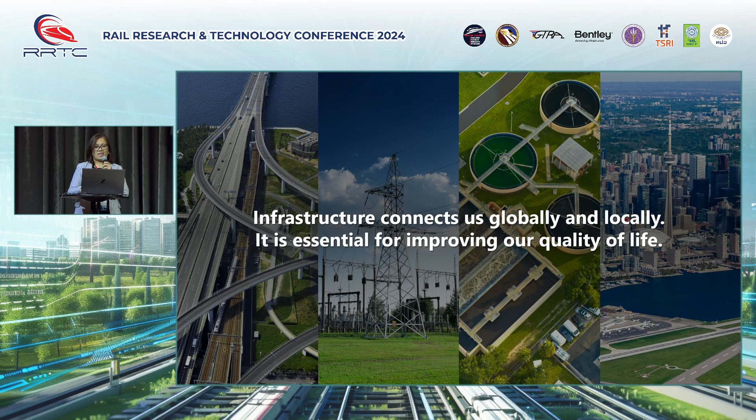And the technology has evolved so much. For the past 40 years since Bentley was founded, our founders, the Bentley brothers, have seen how technology has evolved over the years. From where we save our data, maybe from disk drives, desktop PCs to servers, to mobile devices, and now through different cloud platforms like OneDrive, Google Drive, and the likes. In line with this, we have seen continuous possibilities on different types of project deliverables, from 2D, 3D, 4D, and it keeps on changing.

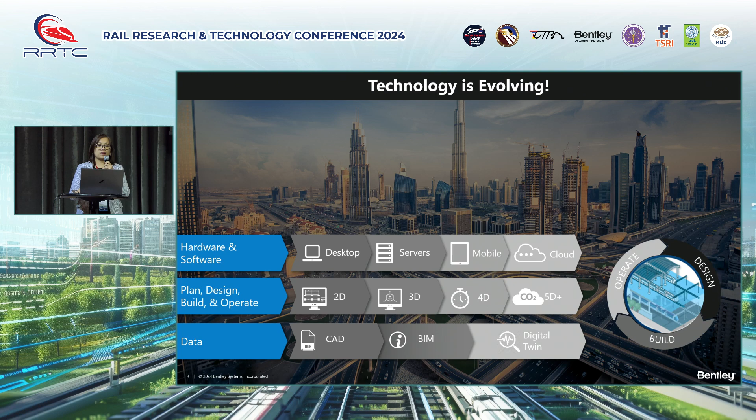As for the industry practices, we have evolved from CAD, BIM, and now the buzzword is digital twin.

Now, despite these advancements in digitalization of the transportation sector, the sad reality is that most of us are still trapped in the traditional way of doing project delivery.

Traditional project delivery relies on point solutions. When we say point solutions, there is this concept of handovers, wherein the handover from design into construction, then from construction into operations and maintenance.

And most often, these handovers are from different organizations. So one organization could be the one performing design, then they would hand it over to a construction firm, and then once the asset is created or augmented, it would be handed over to operations and maintenance.

But this handover, or those handovers, are quite fragmented, and those point-to-point connections lead to loss of information, and the value of the data has become useless.

For example, during the design process, many designers are not looking at the entire problem. Maybe they would only be concerned with their own project deliverable, and they are not looking into using different types of data to help them collaborate with other disciplines. They're not looking at the bigger picture.

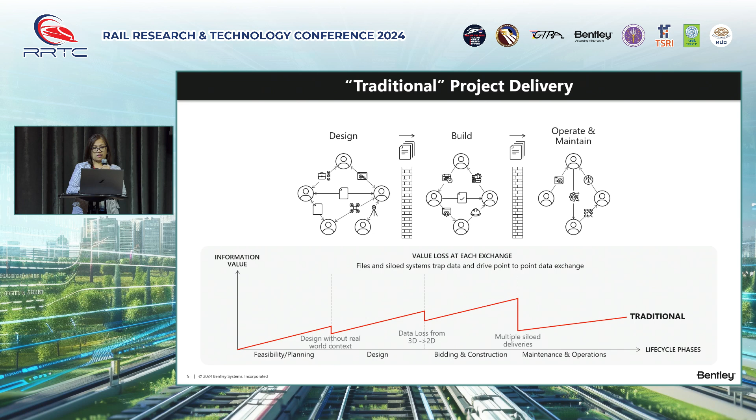Now, ideally, we would want to have a data-centric type of project delivery. Using data better is the key to addressing the changing environment that we are in. This graph here illustrates the value of information comparing a traditional handover with a data-centric and collaborative approach.

With Bentley, we are reimagining how we are leveraging data centricity to enable collaboration and ultimately connect people and data along the entire project lifecycle, from planning, design, build, and operate.

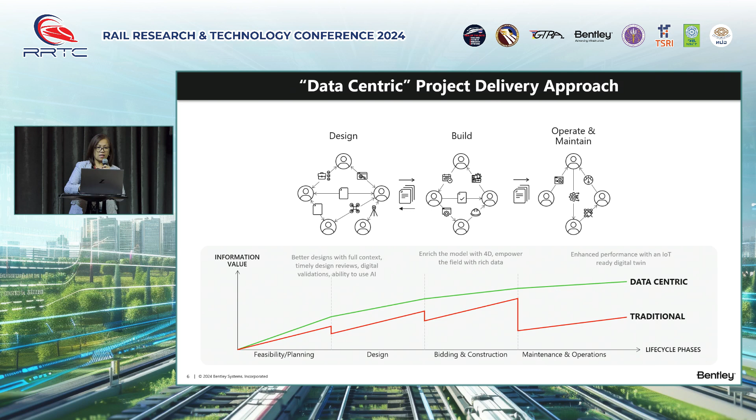Now, here's a sample, although I'm not too sure if it's clearly visible on the screen. Here is an example of a proof of concept of a railway project shown in an internet browser.

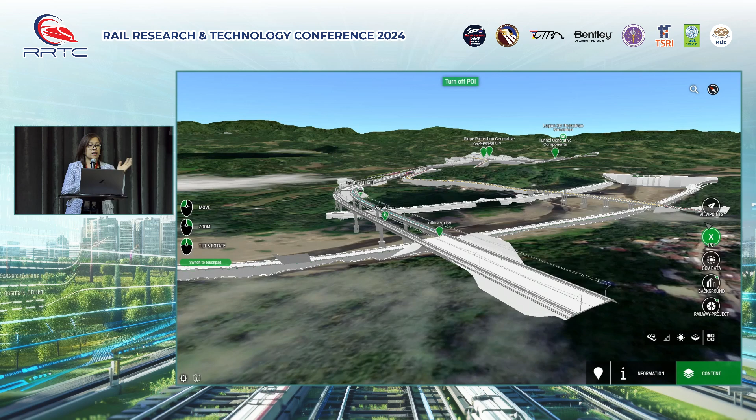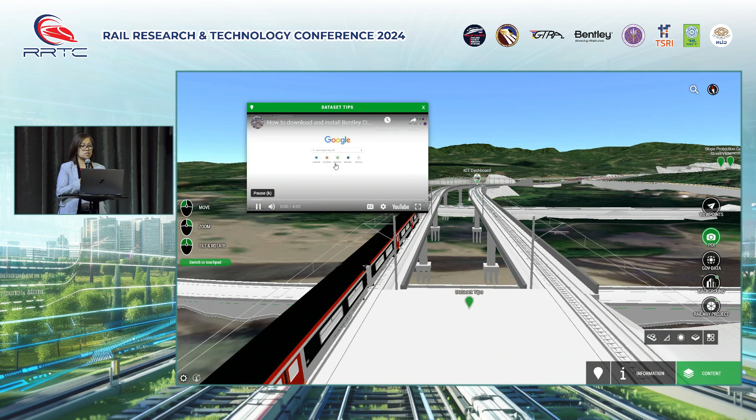These are federated models from different project teams. At the very start, the project is geo-coordinated to make sure that all submissions are using the same coordinate system, and the railway corridor was actually designed using an open solution or application of Bentley.

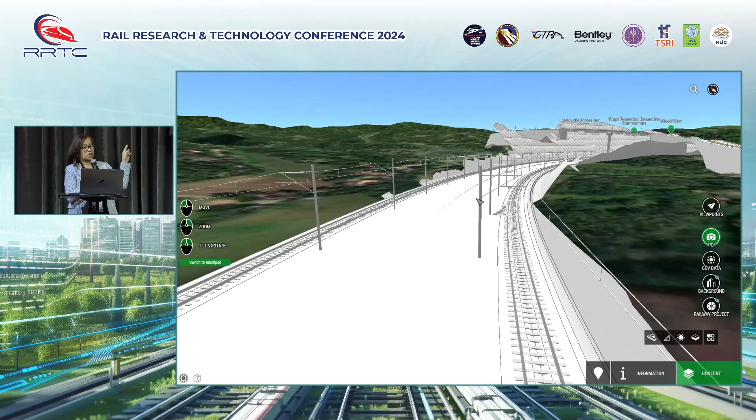Some parts, like the stations, were modeled using third-party software. And this graphical user interface is also able to link to IoT sensors to give information as to how the asset is performing as designed after construction.

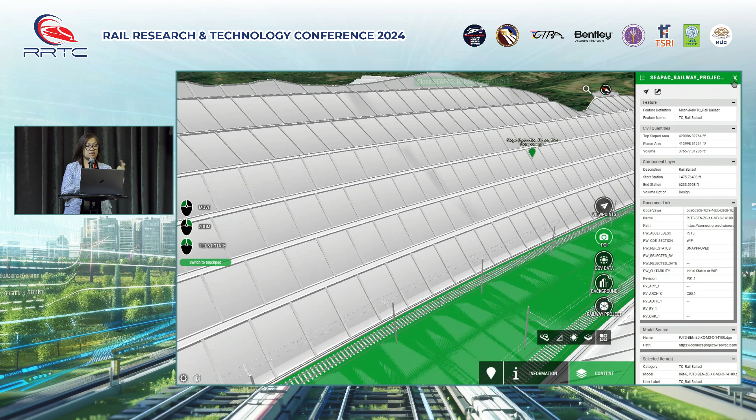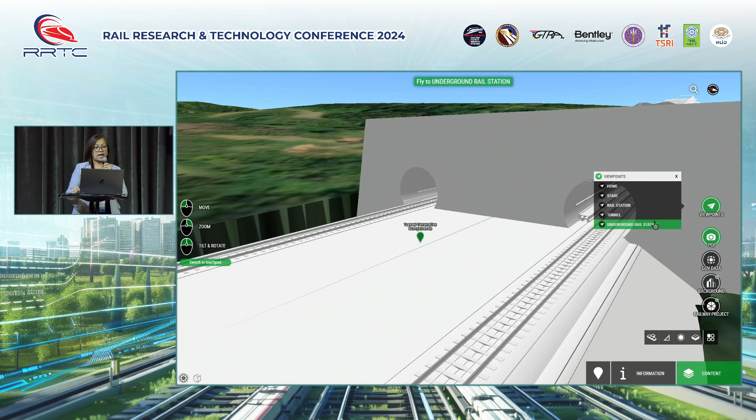And the asset information is readily available at the click of a button, mainly because during the design stage, the owner of the project has mandated that asset data, such as business, design, or even maintenance data, must be attached to every significant item in the model.

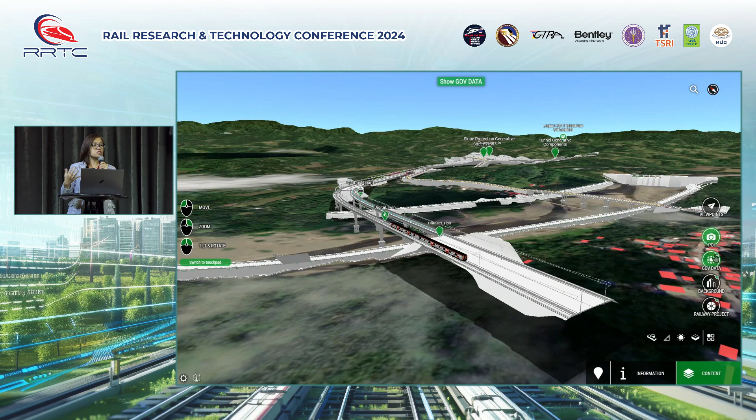And looking at the entire context of the project in the real-world setting, we also leverage GIS and other types of information models or data, maybe coming from different government agencies. And this can also be linked and displayed in such an interface.

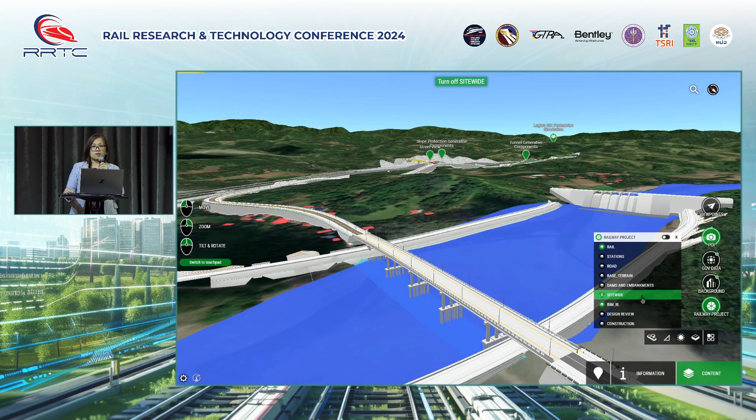Now, all these are federated data models that were pulled from a common data environment, set up adhering to industry standards, and maybe even further linked to different business dashboards, such as Power BI, to extract more relevant outputs as deemed necessary by owners and operators.

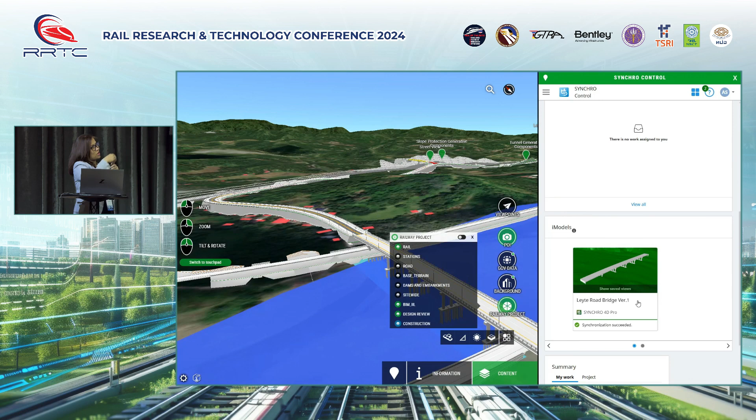Now, maybe you're asking, how do we come up with such a digital twin?

With Bentley Systems, we see project phases as an interconnecting, continuous loop, where one phase is actually influencing the next. So it's an infinite loop, okay?

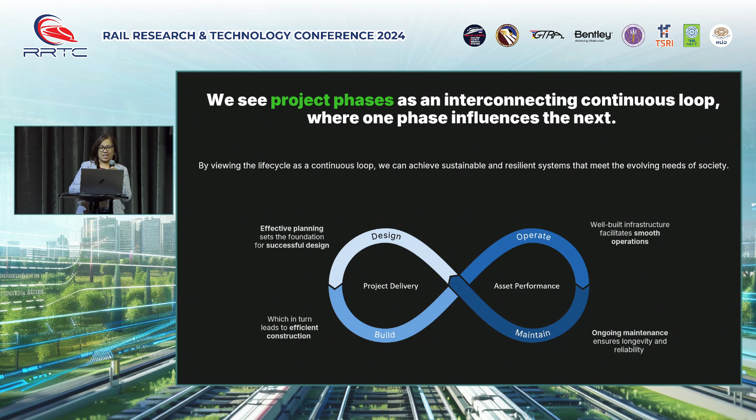And I've already mentioned digital twin, but let's explore more on what a digital twin is, specifically an infrastructure digital twin. In the simplest description, it's actually a virtual representation of a real-world asset or assets or processes, synchronized at a specified frequency and fidelity.

So the infrastructure digital twin is a way for us to connect different data and systems created by diverse design tools into a federated environment, with no disruption to your current tools or processes.

And it helps you streamline your workflows and make sure that you don't just output a nice visualization, a nice 3D model, but you're able to reduce cost and the risk of projects, and ensure improved collaboration and transparency between the project stakeholders.

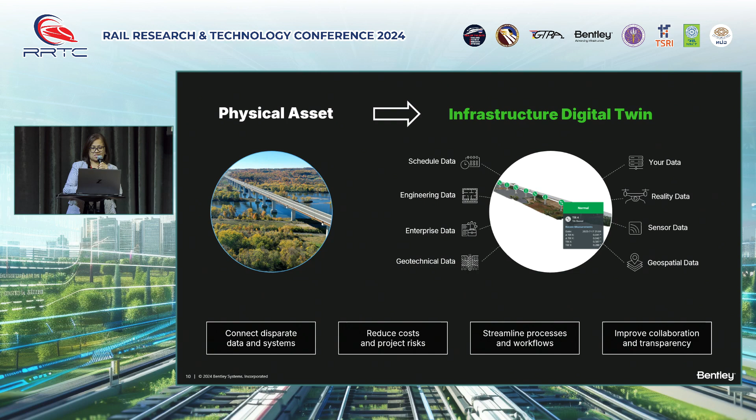Now, if we move on to standards and policies, some of you may have heard about the common data environment.

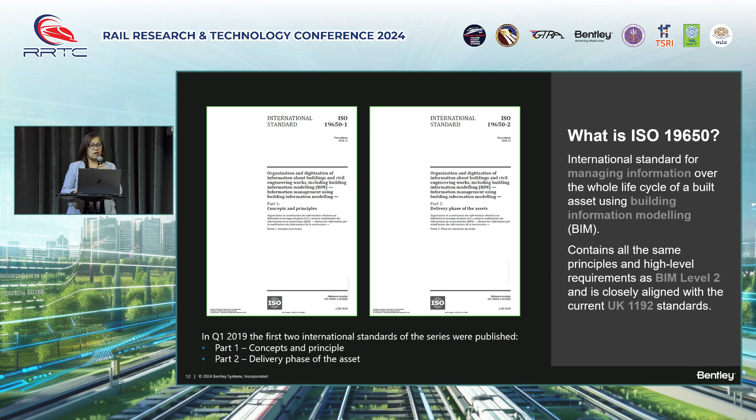And we need to make sure that we manage information properly and effectively in the whole project life cycle of an asset. The best standard to adhere to in terms of infrastructure is ISO 19650, which actually uses the principle of high-level requirements of BIM Level 2.

Then closely aligned with the UK 1192 standards. Now, the ISO 19650 is actually leveraging building information modeling.

Getting benefit through better specifications and then delivery of just the right amount of information concerning the planning, design, construction, operations, and maintenance of infrastructure, and not just buildings.

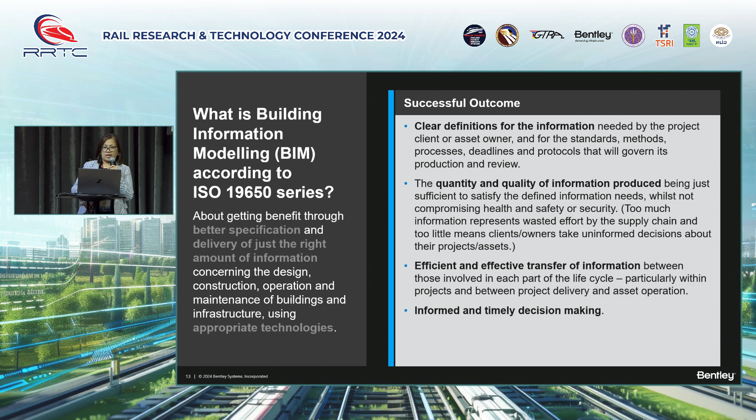And I will not go through much detail about the common data environment, because I think most of you are more knowledgeable in terms of knowing or discussing common data environment, since most of the attendees here are professors, or in line with the academe, or owners or operators.

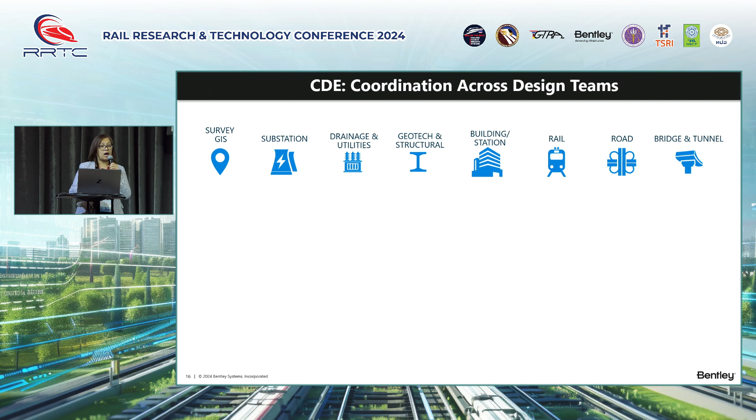But what we want to interject here is that having a common data environment would basically allow you to coordinate across different design teams, not just architecture, not just for buildings, but in a typical railway project, it's not just the corridor that you are concerned with.

There could be, or you could be starting from survey, and then creating or designing stations or even substations, drainage and utilities. Of course, you have to know what's underneath as well.

So that's where geotechnical solutions come in. And of course, the rail, road, as well as bridges and tunnels.

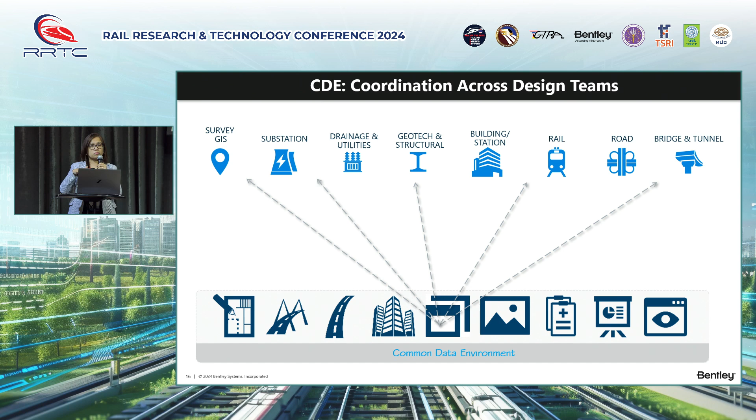Now, having a common data environment would help you enhance collaboration, basically because the workflow would be seamless, taking care of the point-to-point challenges that you face in traditional types of project delivery.

And it would be best, or recommended, if it is mandated from the very start by the owners and/or the operators, and so on.

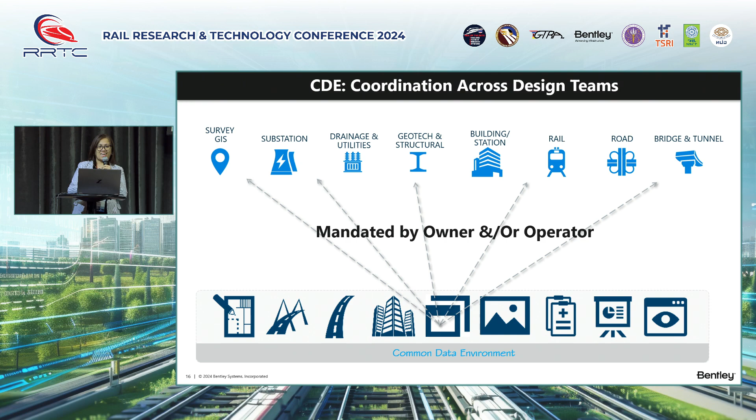Now, apart from us establishing a common data environment, it would also be a best practice to come up with a common modeling environment.

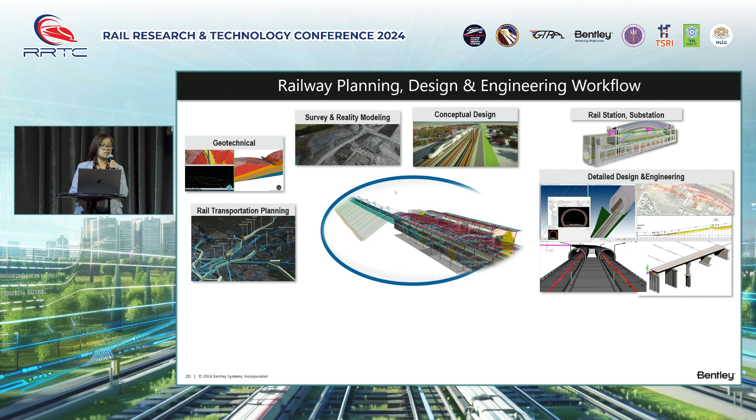Now, in a typical railway project, from planning, design, and engineering workflow, we would be dealing with disciplines or requirements for geotechnical or rail transport planning, survey and reality modeling, then maybe creating feasibility studies, creating conceptual design, stations or substations, and then, of course, the detailed design and engineering of the railway itself.

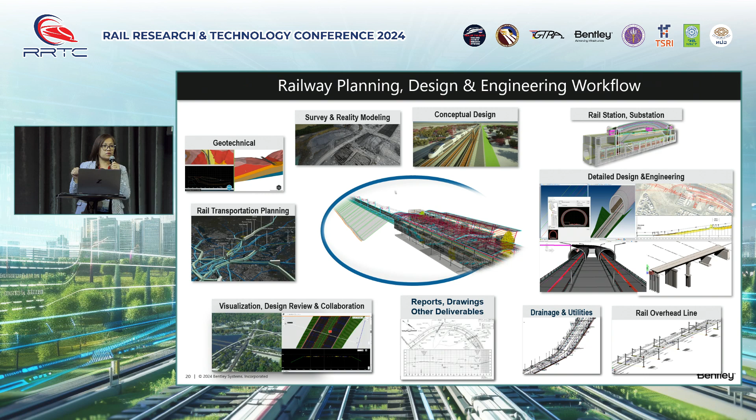Then adding drainage and utilities, rail overhead line, and defining your project deliverables, making sure along the way of the workflow you are doing an effective design review as well as collaboration. Now, if I may go back to this slide, putting connected data and a common modeling environment is a good way to make sure the connectivity of your data is streamlined along your workflow.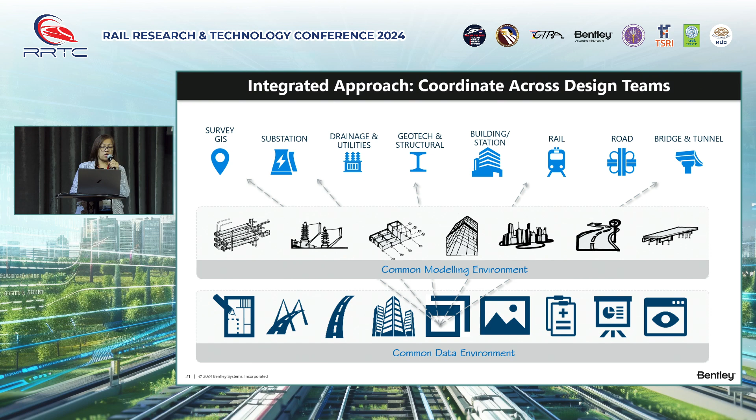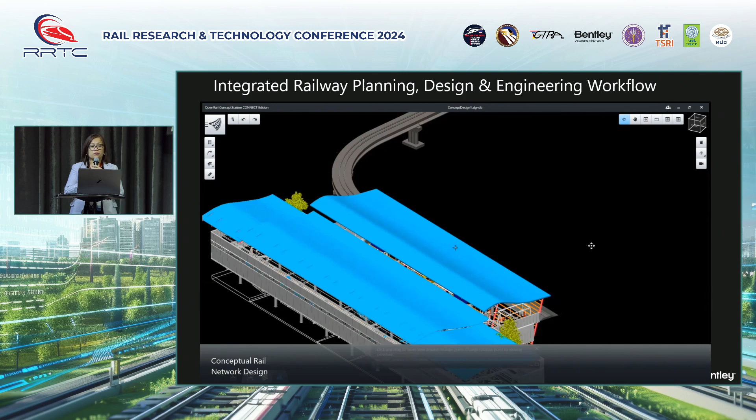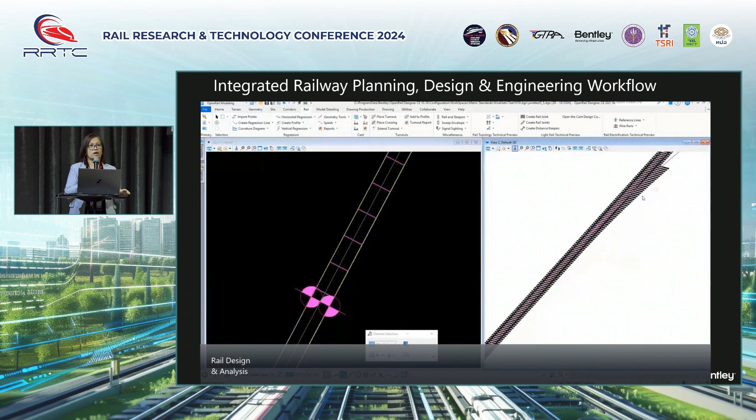This video is one example of how we can leverage different technologies to make sure we have a good workflow in terms of survey and conceptual design, as shown here, of a railway corridor. It could be at grade, underground, or along a viaduct, and then move on to the detailed engineering design of the railway, adhering to different industry standards.

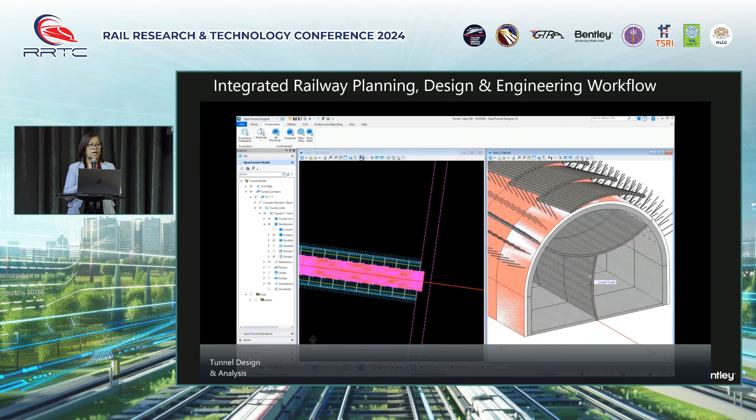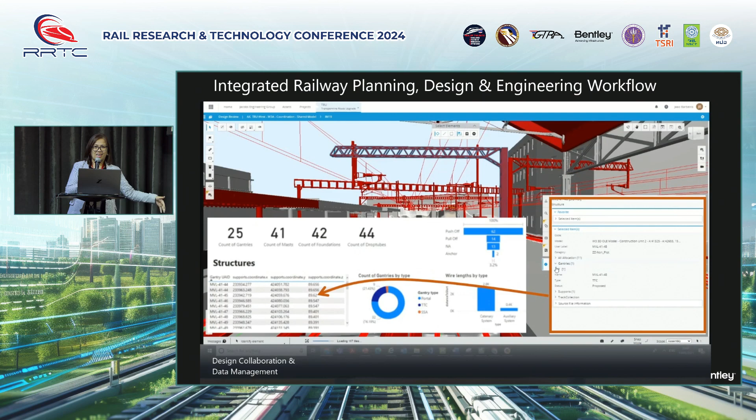And if a tunnel requirement is needed, you also have tools that would allow you to analyze what is underneath before you actually do an excavation or tunnel boring along the alignment. It would also be best if you know how to handle different changes that happen when you're doing your design and engineering.

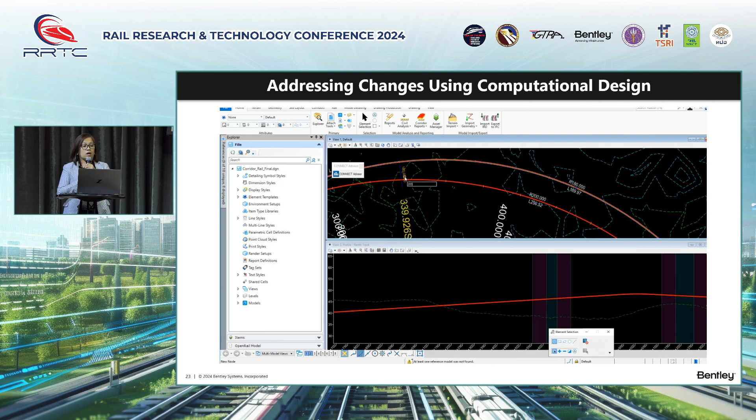And this is one way for you to address these kinds of changes. Whenever there are changes in the alignment, computational design can be leveraged in order for you to make sure you handle changes properly.

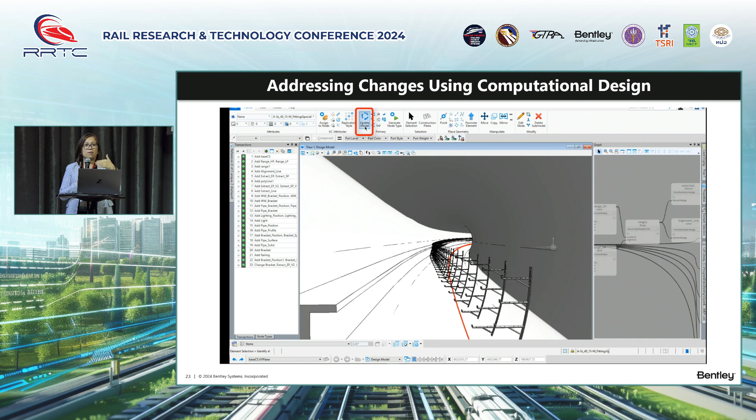You don't need to recreate your model because you have an available script that you just update when the alignment updates. This shows that the alignment has been updated, and you don't need to remodel the MEPs that run along the tunnel alignment. All you need to do is refresh that script, and it will follow and adhere to the changes that happen to the alignment.

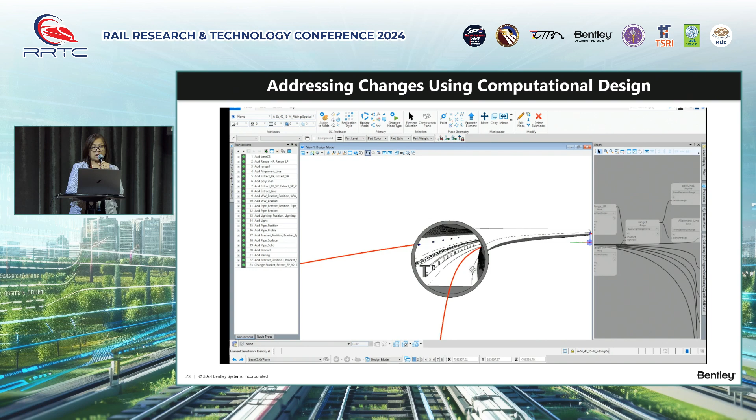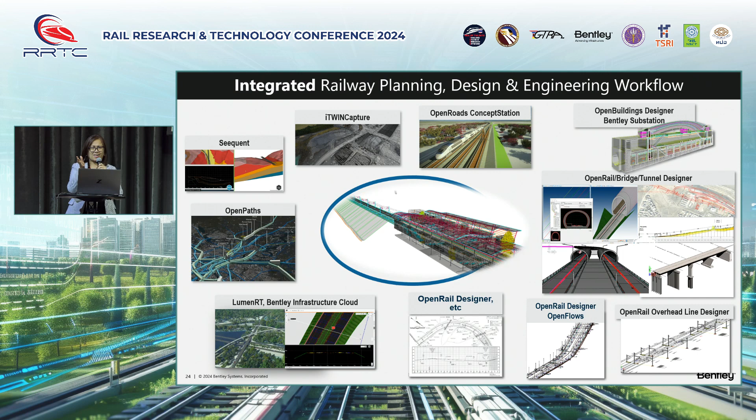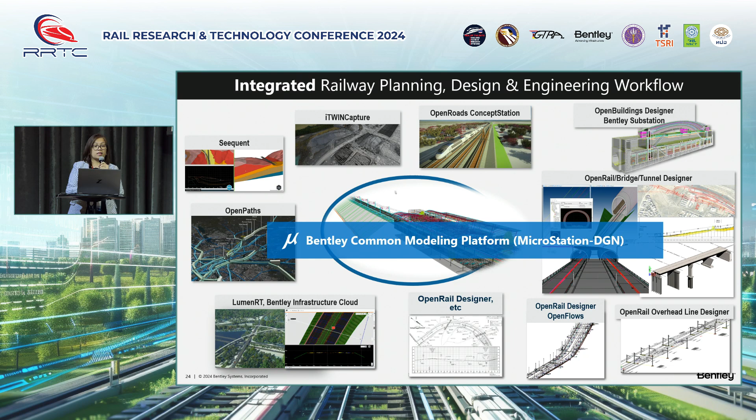And if I may give a name to the solutions I have shown so far - for Bentley, these are the solutions used in that particular workflow I've shown earlier. Most of these use a common modeling platform, which is MicroStation, with a file format of DGN. But the reality is you may be using other platforms or software, and I'll be discussing that later on.

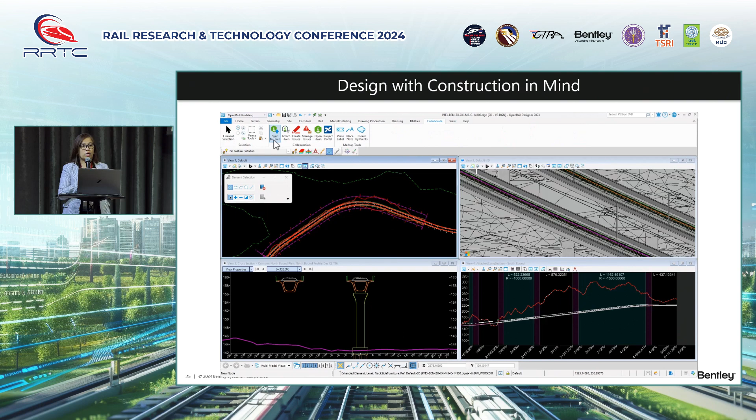When we're doing design, we have to make sure we have construction in mind - that we adhere to construction practices, and this really depicts what is happening on the ground. So having a tool that allows you to do design review and analysis while you're doing your design is a good practice in terms of doing your collaboration.

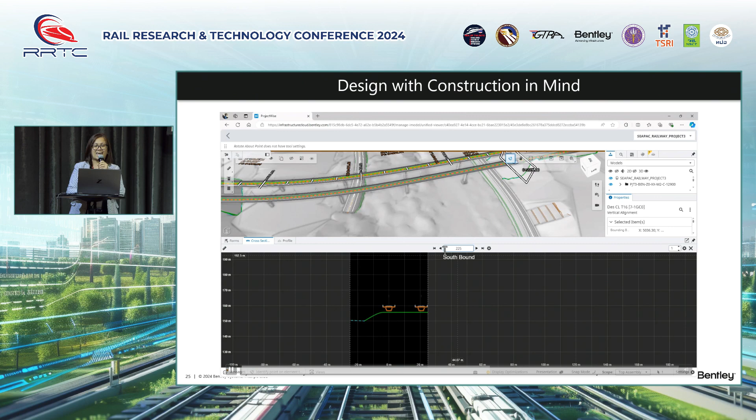And then I was given 5 minutes, but I still have like 10 slides to go. So I hope I'll be able to present the slides.

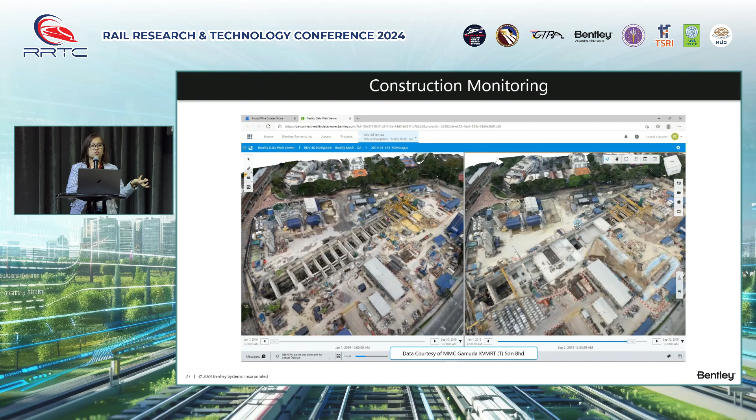This is one example of how we leverage the digital or infrastructure digital twin in the construction monitoring of a railway site. This example is from Malaysia, where they leverage the reality model to know the progress of construction on the site over a particular span of time.

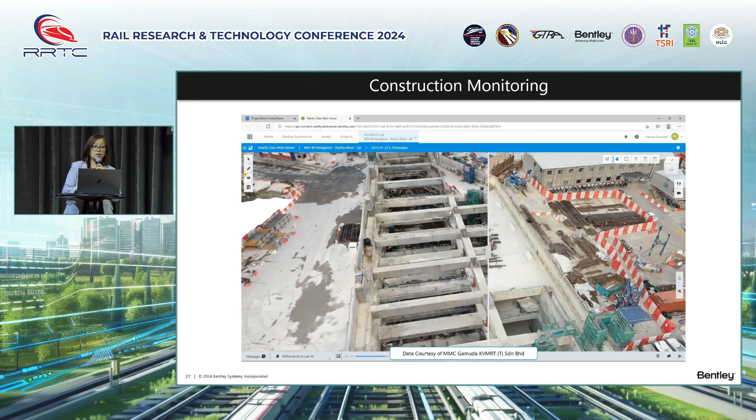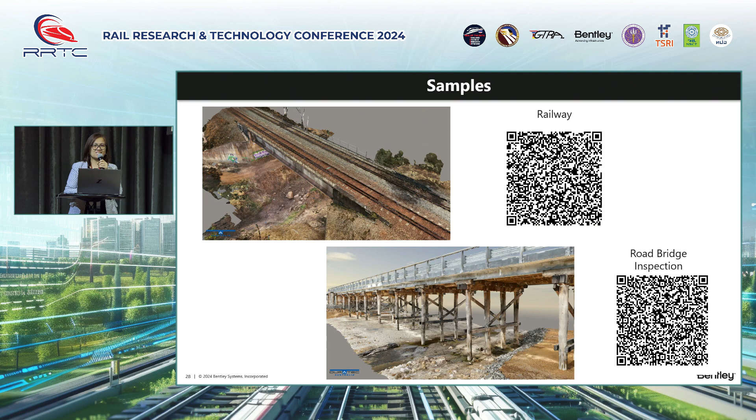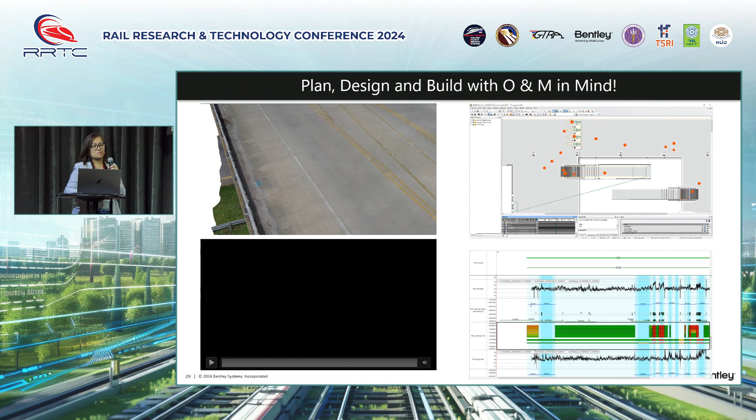So, plan and design with build, or plan, design, build with operations and maintenance in mind. In every aspect of our planning, designing, and construction, let's be sure we have operations and maintenance in mind, so that we don't waste data.

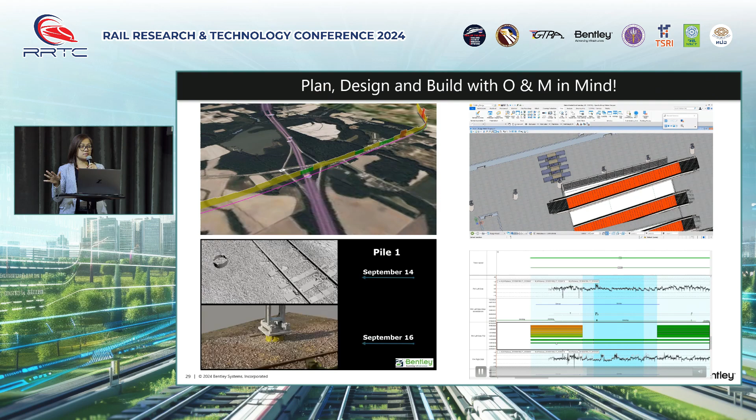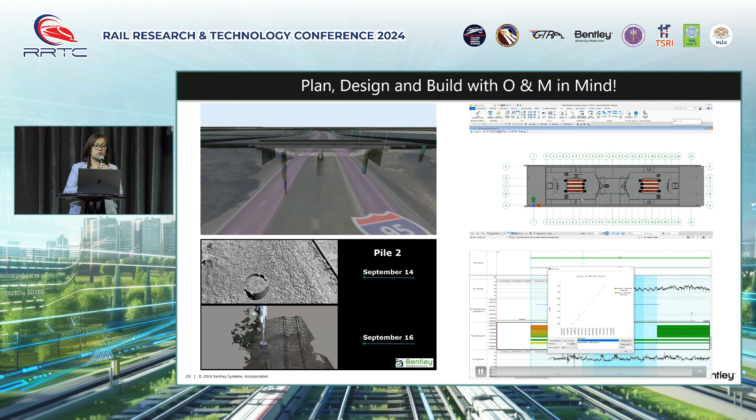We don't waste data, and we make sure there is a seamless flow of information within the project life cycle. It would also be best if we create or have a country data set or a standard - from CAD standards or rail or roadway detailing standards, country design criteria, and maybe localized BIM standards as well.

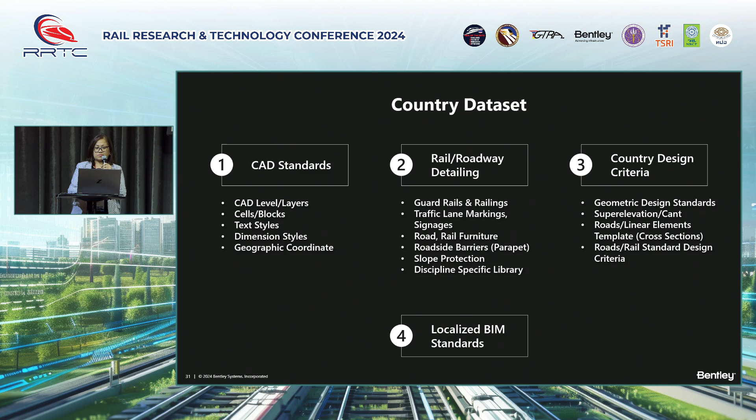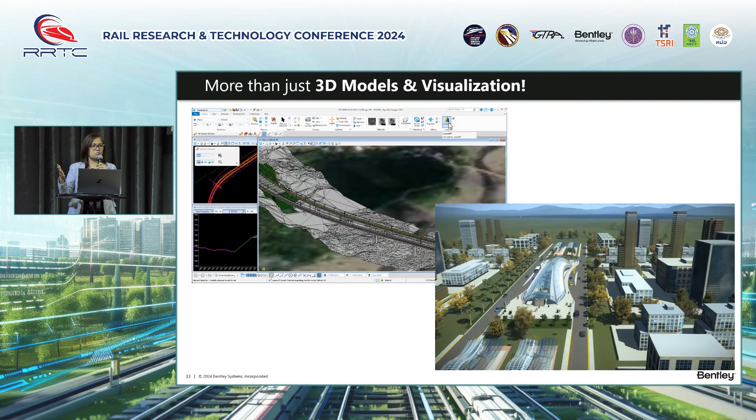Now, moving on to the last part of my presentation, infrastructure digital twin is actually not just 3D models or visualization. We tend to denote information modeling or infrastructure digital twin with just seeing a nice visualization or a nice 3D model, okay? But in fact,

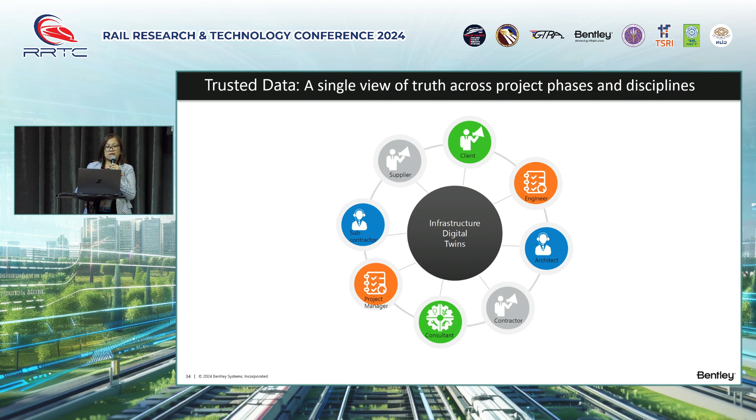If I may just address the openness of the platform of Bentley application, we do support not just our own file formats, but also other third-party solutions. So we have this Bentley Infrastructure Cloud that would allow us to marry all this disparate type of data, and then use your own APIs in order to extend that data in an interface, or in a graphical user interface that would show different aspects of your business or your project. Adding on different types of data, IoT sensors, maybe extending it to ERP or CRM systems, using reality data, and then merging it, resulting in different types of outputs or outcomes, okay?

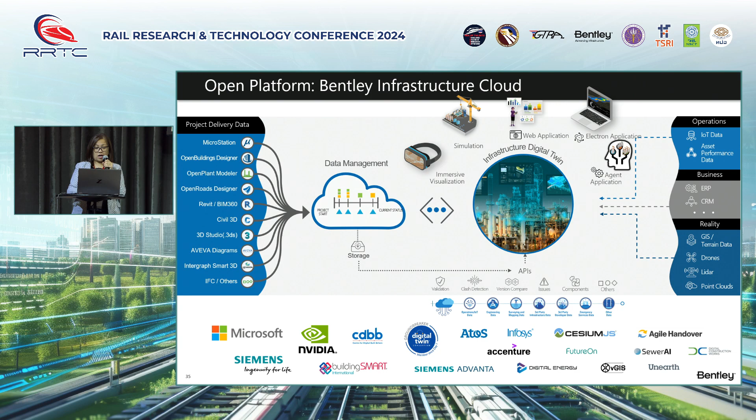And this platform is actually working alongside different industry players, okay? And actually we have acquired Cesium, which gives us more photorealistic 3D tiles of Earth, or any location, depending on our project. And Bentley Infrastructure Cloud connects data and people across the project life cycle. As I've said, it should be ideally a continuous process, producing results that are not just for us to present our project in a 3D visualization.

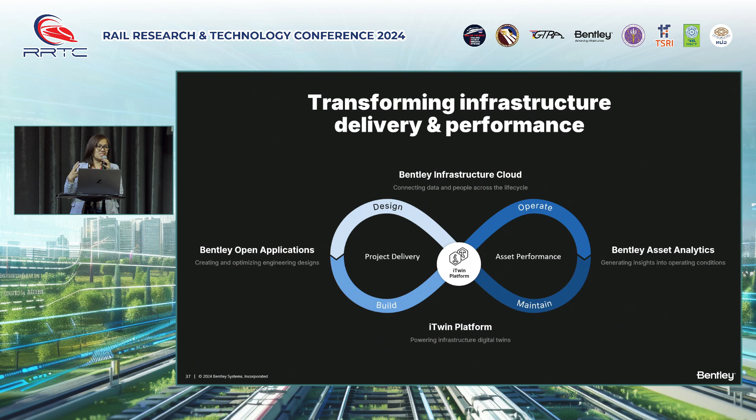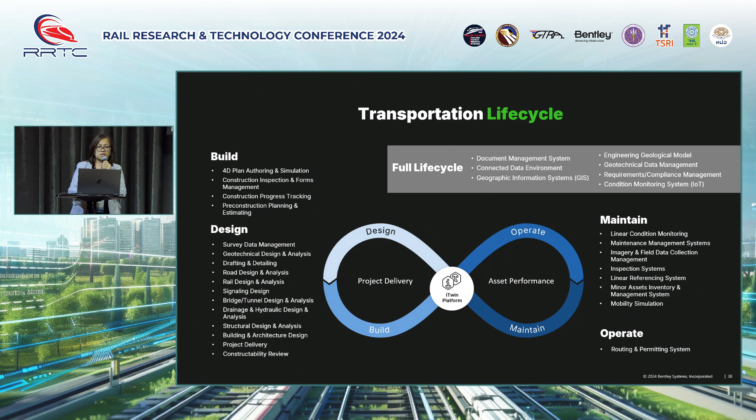And I think you know that transportation life cycle, basically build, design, maintain, operate - these are the workflows. Now, if I may just put names to these workflows specific to Bentley solutions - hopefully it's clear on the slide or on the projector - every aspect of the project life cycle, we have specific solutions that address these phases of the project life cycle.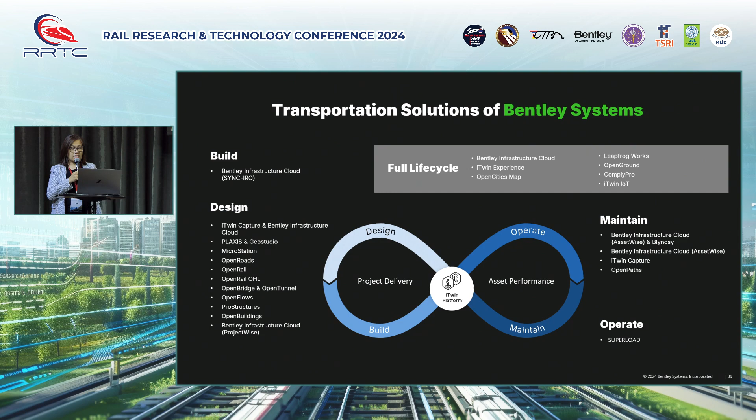And lastly, best-in-class organizations benefit from this infrastructure digital twin. As presented yesterday by my colleague, Andrew Smith, it's not only in the US and Europe, it's also being adopted here in Southeast Asia. And hopefully we'll be seeing a lot of adoption from Thailand as well. And with that, I would like to thank everyone for listening and watching my presentation. And just a last note: plan, design, and build with the end in mind. Thank you very much.